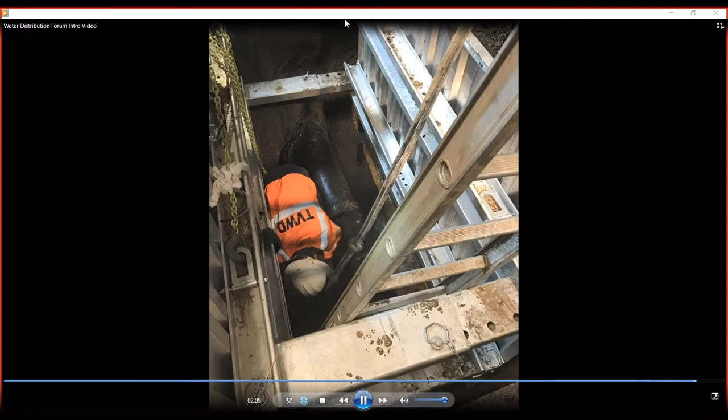We're here today to give a presentation on really what's our water distribution system, how's it work, and how do we get water from where we do to your home. So today we've got Pete Boone, who's going to be talking to you about that.

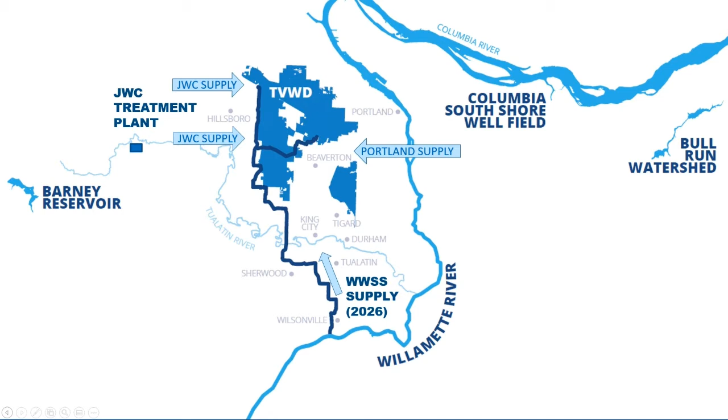So if we zoom in a little bit and talk about our service area at a little closer view, we serve about 45 square miles. You can see where we're located here in between Beaverton and Hillsboro, bounded on the north by the West Hills, bounded on the south up onto Cooper Mountain, and then we also have our Metzger service area near Highway 99 and 217. We serve a population of a little over 230,000 people.

We serve parts of some cities, so parts of the city of Beaverton, a little bit of the city of Hillsboro. We have service area agreements with both of those agencies, and we deliver that water through about 60,000 individual service connections. So the majority of those connections are residential.

Our service area is a little bit interesting. It's unincorporated county. Most of it's developed in residential form, but the majority of our service area is not part of a city, and that's a little bit unique. A lot of times when you think of urban services, all of those are provided by a city government, but in our case, it's part of Washington County for the most part, and we are one of those service providers, along with Clean Water Services for your sewer and stormwater treatment, and some others that round out that list of urban services.

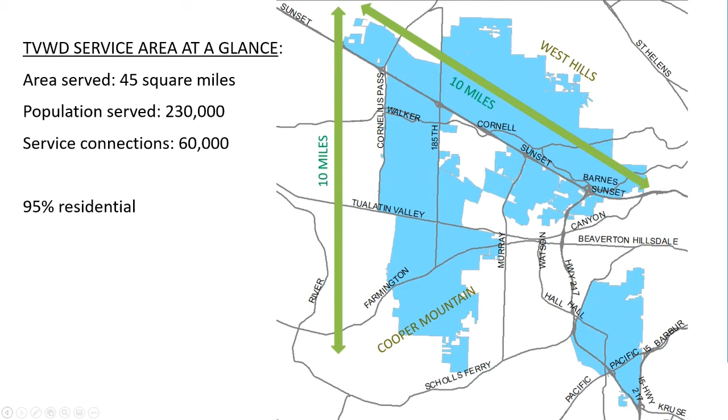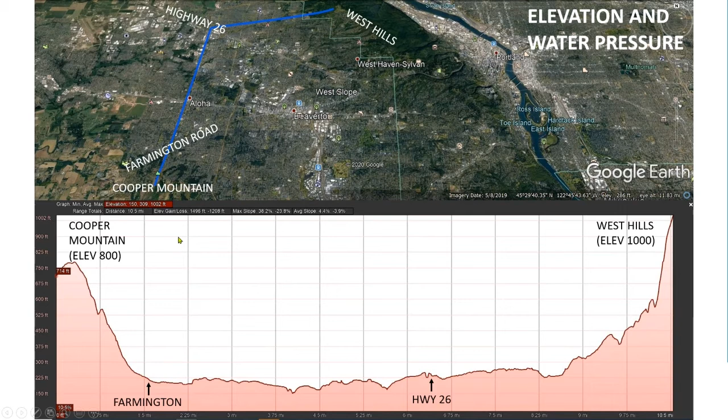So if you think about what that alignment looks like if you were to drive it, that's the lower part of your screen. So you would start up on Cooper Mountain at an elevation of about 800 feet. You would drive down to the valley floor, across the valley floor, and then back up into the West Hills. And so what's important about that is how it relates to water pressure. So if that from Cooper Mountain up to the West Hills were full of water, if we filled it up as a lake, that water would be about 600 feet deep. And at the bottom of that would be a very high pressure.

So that would be problematic if all we had was tanks at the top of the mountain and pipes to serve all the way across the valley floor, because the pressure in those pipes would match closely this depth of water that would be if it were a lake. So if you lived on the valley floor and you had 260 pounds of pressure in your plumbing, every garden hose would be a pressure washer, and every shower would be a pretty painful event. So we regulate the water pressure, and we do that in a couple ways that I'll talk about here.

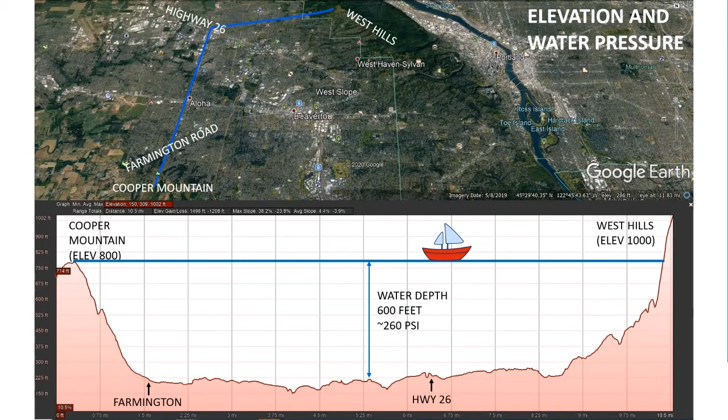But to tie this back to the human body and physiology, the corollary here that we would be concerned about is high blood pressure. If you go into the doctor, they check your blood pressure. If it's over a certain level, they're going to be concerned about that because it can cause problems in your own body, and they're going to try to regulate that as well.

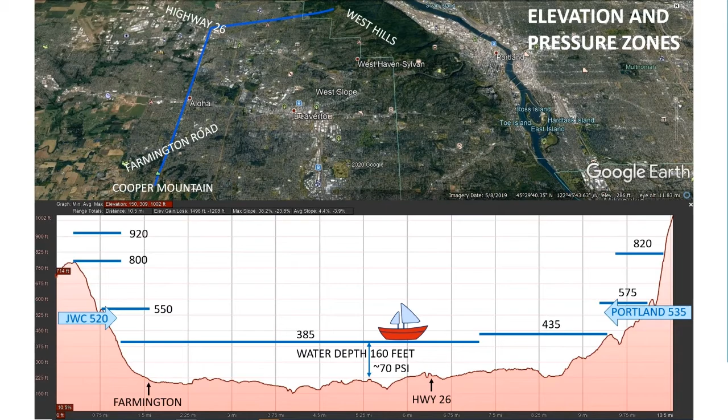If you look at the south part of that, up onto that Cooper Mountain area, we've got a pretty good collection of pressure zones. That's because that elevation is changing quite a bit. Same in the West Hills. You can almost follow the bands of elevation with those pressure zones. So we've got our service area divided up.

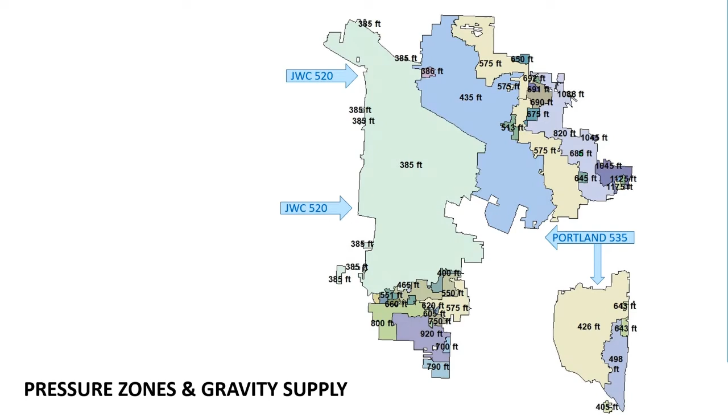Okay, so we bring water in from Portland and the JWC. We can serve a lot of that just under the gravity, the pressure that we receive it at. But to get it up to the upper elevations, we have to pump it. So we do that with electricity. We've got 13 different pump stations. Most of those stations have multiple pumps inside of them. And if we do lose that electricity, they've all got backup power generators, so we can turn those on when PGE loses power, and we can continue to pump water as we need to.

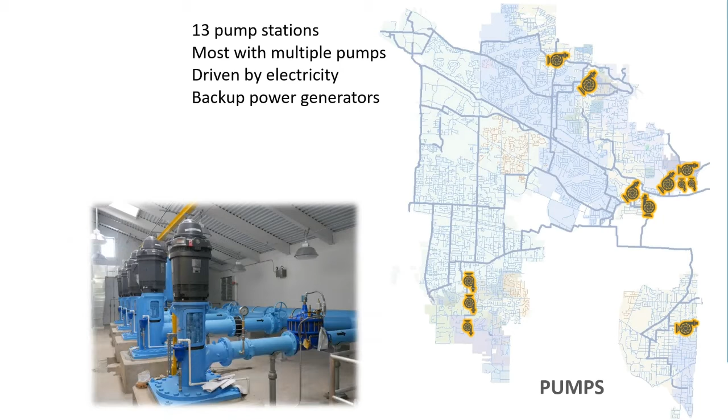And not surprisingly, the analogy here with the physiology is our own heart. Of course, our bodies only have one, and when it fails, that's a pretty big problem. So we like the redundancy of having the multiple pump stations, multiple ways to move water around.

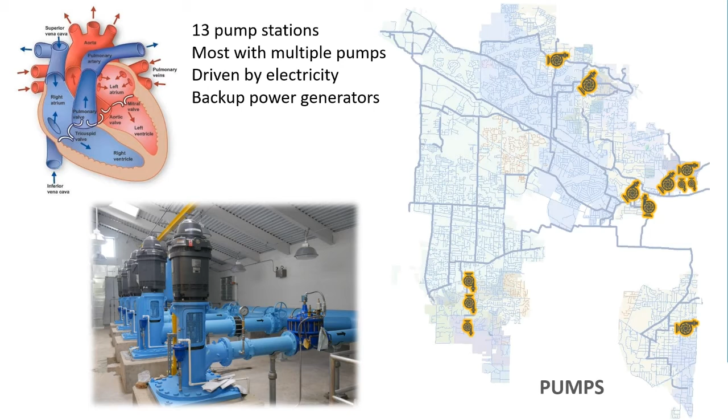The other thing we do with water is we store it. So our storage reservoirs are, not surprisingly, a lot of times located in the elevated zones. A lot of pressure zones have multiple reservoirs for redundancy. Some pressure zones don't have their own reservoir at all, but they sit below one, so they take advantage of that storage that is at a higher elevation.

Our tanks range in size. We've got 23 of them. They range in size from fairly small, so 125,000 gallons, all the way up to 10 million gallons. So our largest tanks are 10 million gallons. And this gives us a total, if they're all full at the same time, of 67 million gallons of storage.

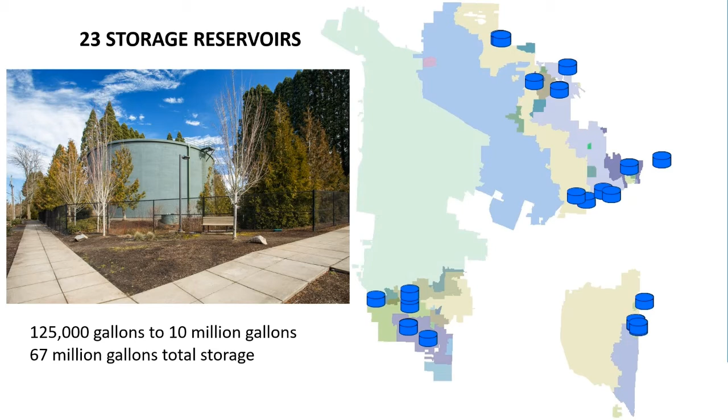But bigger is not always better, especially when it comes to water storage, because a really important part of our mission here is serving high quality water, and we want that water to be fresh. So if you can imagine, if you have very large tanks and you're not able to circulate the water through those very easily, you've got a big volume of water that's going to be getting older all the time. And so we spend a lot of time making sure that we can move that water through our system, bring it in as supply, and deliver it to our customers in a short amount of time, so that it's nice and fresh when we do that.

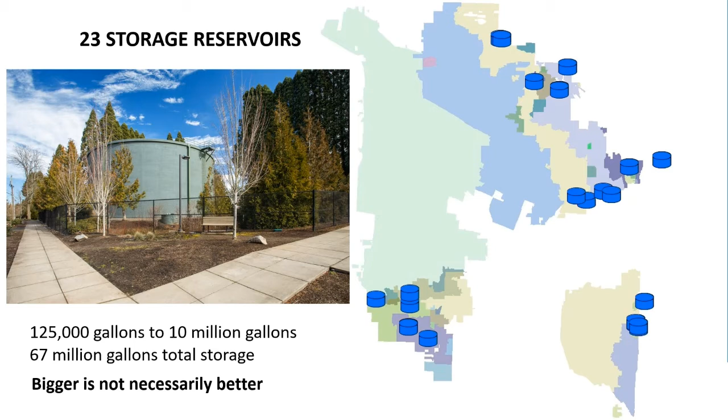And if you think about the scale of 67 million gallons, it's somewhat comparable to the Moda Center. So if anyone's been to a sporting event or a concert out there, some rough math gives you an interior volume, if the Moda Center was full, of about 200 million gallons. So we've got a little bit less than that in storage, but we're also always bringing in more and sending it out through our service connections.

It's interesting to think about going to a sporting event or a concert in the days of COVID and how long it's been since we've done things like that.

And of course, a big component of our water system is our pipe network. So we've got to move this water around. We do that through the pipes, and it takes quite a network to do it. So we've got over 750 miles of water main, and those range in size from 54 inches in diameter all the way down to 2 inches. As you can probably imagine, the bigger pipes are tied to the reservoirs in most cases, and you can see that on the map.

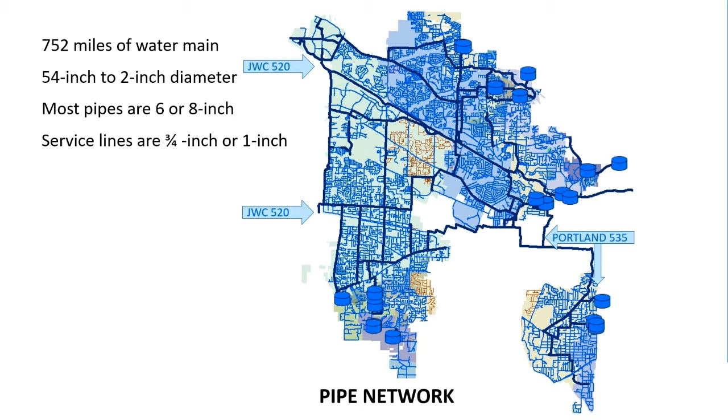And then we step down as we get into the neighborhoods with smaller pipes, similar to the blood vessels, going from arteries to capillaries and such. So most of the neighborhood pipes, a distribution pipe on your street, will typically be a 6 or an 8-inch diameter. And then the service line from that pipe to your home is going to be a 3/4 or a 1-inch diameter.

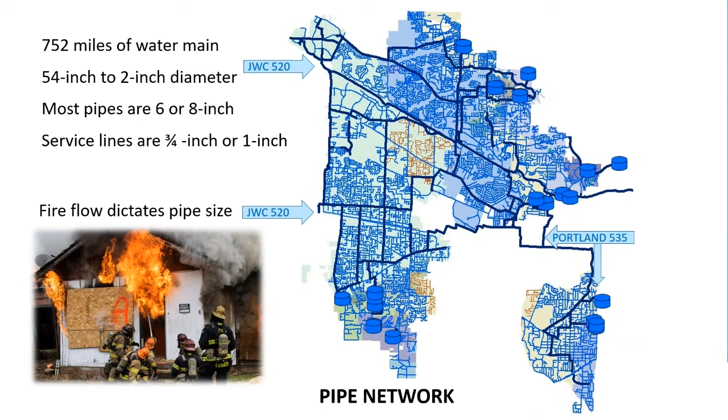And how we size those pipes, especially the distribution lines, is by fire flow. If we did not have to deliver fire flow to hydrants, most of our distribution pipes would be smaller diameter, because domestic flows are less than what a fire department's going to require if they're battling a fire. So our pipes are sized to deliver those larger flows, and make sure that we can always provide water to those hydrants in an emergency.

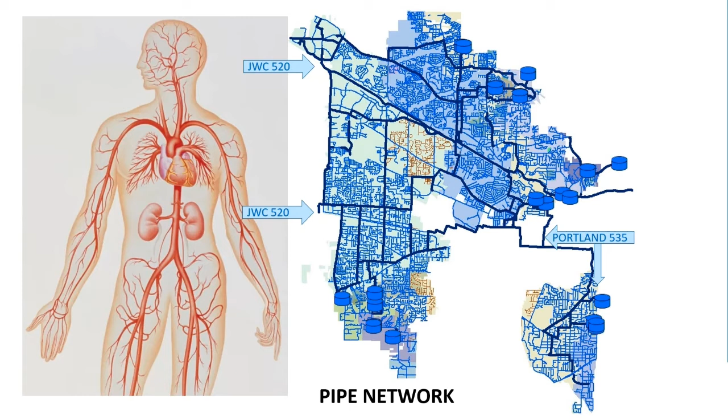And of course, our own human circulatory system is a good proxy for how we move water around as well. All right, so let's talk about some of the brains behind the system. So beyond our operators who bring their brains to work and make critical decisions all the time about this stuff, we have a computer network that's connected to most of the facilities in our system. It's a network of sensors that are constantly monitoring what's going on out there, and it helps us to keep track of what's going on. It also provides quite a bit of automation to the water system.

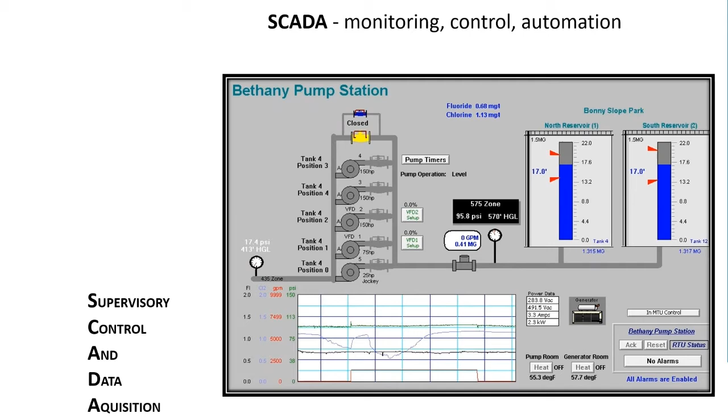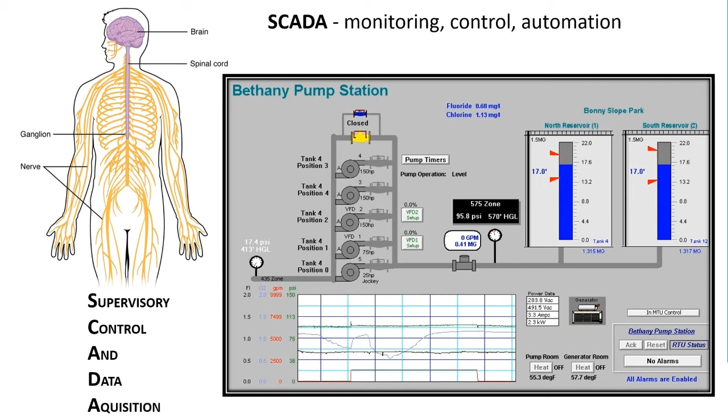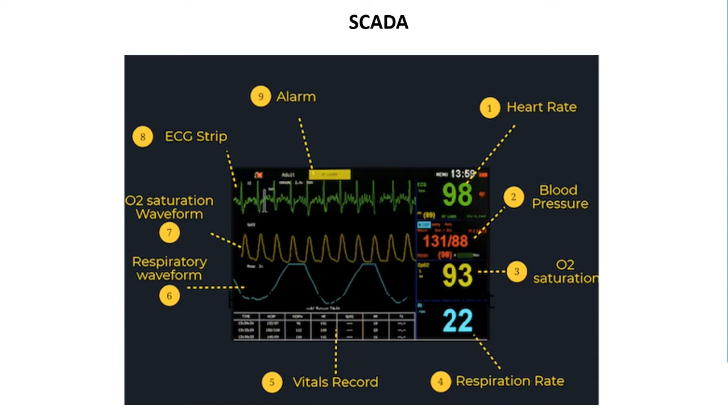And of course, the central nervous system in the body is performing those same functions in people. So if you think about a heart monitor, if you've ever had to go to the hospital, or maybe you've just seen it on TV, this is helping doctors and paramedics monitor what's going on in the human body, showing you trend lines, showing you what's going on, and how things are changing. And that would allow those medical folks to make interventions, make decisions about what they might need to do or how the body's reacting. And really, that's what SCADA is doing for us. So here's a screen showing some parameters in the water system as they change over time, and we're able to process that information and make decisions.

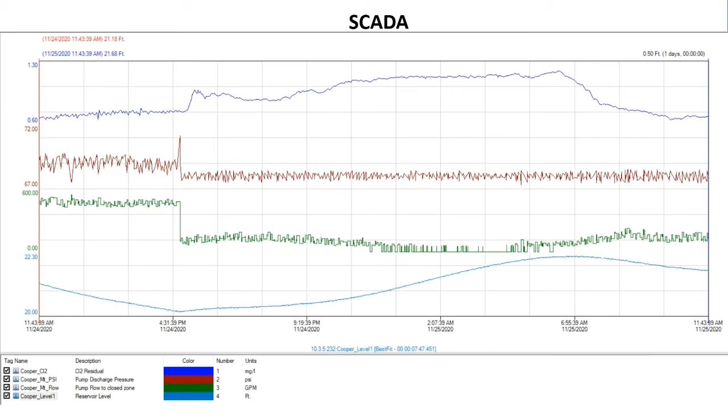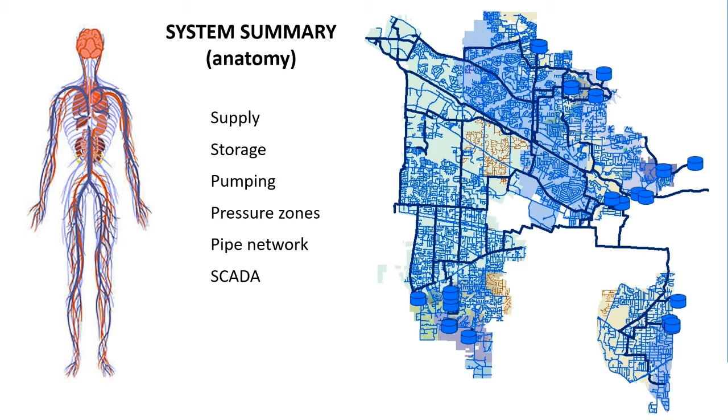So to recap, on the anatomy portion, we talked about supply, how we bring water into the system, how we move it around, we pump it, we store it. We've got our system divided into pressure zones. One critical thing to mention about that storage is, that's what helps us not only be prepared for emergencies if we were to lose one of our water supplies, but it also really helps to regulate that pressure. So as demand changes, and I'll talk about demand in a little bit, that water in the tank is always there to provide more supply as needed. We got the pipe network and of course the SCADA system.

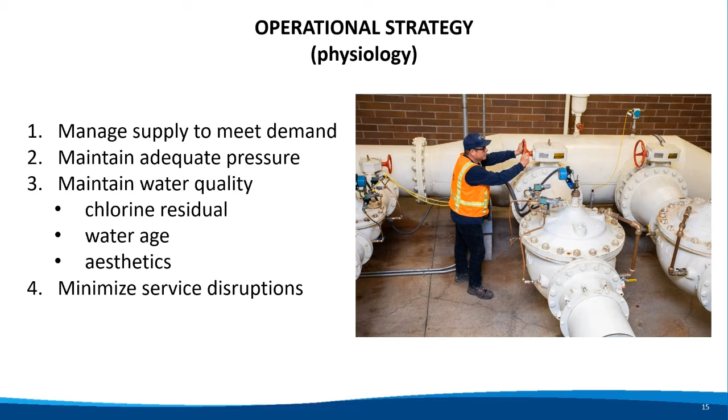So a little more on water age and water demand. So this time of year in the winter, we are serving, and it's a very steady amount, about 16 million gallons per day. So it goes up and down a little bit, but there's hardly any irrigating going on right now. So the demands are very steady day to day. That changes in the summertime as there is more irrigation and other uses of water, and we'll see that daily demand go up into the 35 to 45 MGD range when the weather changes.

And that's really what drives it. It's weather, it's temperature, precipitation, and how much folks are watering. Those are the big drivers in the fluctuations that we see in water demand. So when demand decreases, when we're serving less water out of our system, the water age tends to go up. So the time that it takes water from the day that it comes through one of our supply points to the day that it goes out through someone's tap, that's how we measure water age, and that can tend to increase when we're in periods of lower demand like we are now.

And one of those challenges is the chlorine residual tends to decrease as the water gets older. So we want to maintain that residual. We do not rechlorinate the water that's out in the system. So the best thing we can do is manage the system in a way that just uses up that water. And that storage can be a challenge. We talked about it earlier. So if we have large tanks, if we're not able to fluctuate those and use the water out of them before we refill them with fresh water, that can add to our water age.

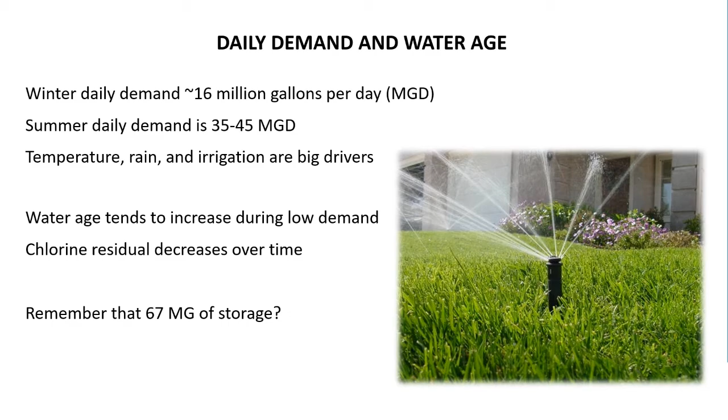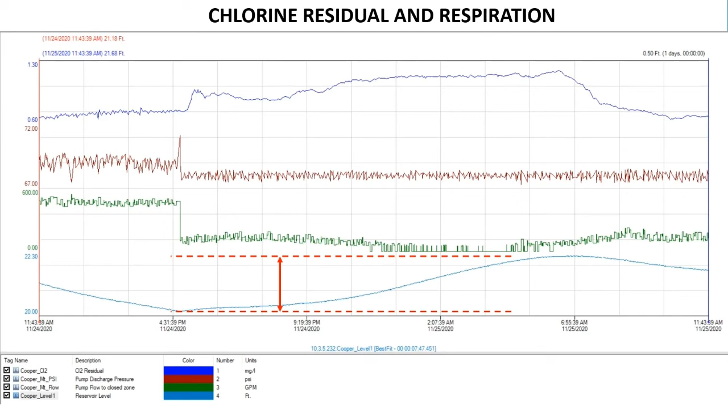So one of the ways that we manage water age, especially in our tanks, is with a concept of respiration. So when you think about how your bodies respirate, you breathe air in, you breathe it out. We try to do that same action with the water level in our tanks. So on this SCADA screenshot, the blue line that you see at the bottom, that's measuring the water depth in the tank, and we're just trying to cycle that up and down. The top blue line that you see on that screen is a measure of the chlorine residual that's in the water, and you can see how it responds to that respiration. So as the tank level rises, it's fresh water coming in, it's got a higher dose of chlorine in it, and that maintains that nice residual that we have in there to maintain water quality.

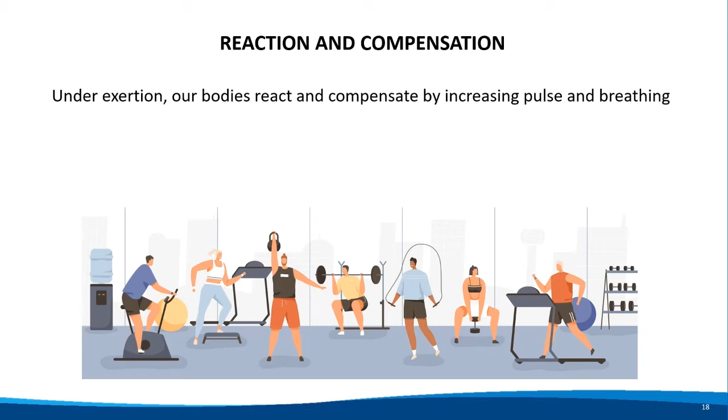All right, so a little bit about how our system reacts and changes to fluctuating demand and things like that. In our human bodies, if we're under exertion, our bodies compensate. They react to that by delivering more oxygen to our tissues. We do that by increasing our heart rate. Your breathing rate goes up, and similar things happen in the water system. So if demand goes up, customers are using more water, maybe there's a fire flow. The water level in the tank is there to serve that need, but it might draw the tank level down as it does so. When the tank level drops, our SCADA system can detect that, and if it needs to turn on an additional pump to send more water up to that tank, it'll do so.

And at the same time, our operators can monitor what's going on, and if they need to change supply or make other adjustments, they're able to do so. And we think about that in terms of automation, so the reaction that SCADA does on its own based on the programming that's in there, or intervention, when an operator would make different changes based on other information that they're seeing.

A couple things that we do to make sure that we have high quality water, and you might see us out in your neighborhood doing this. So we flush. That has a couple benefits. So one, it'll remove sediments that are naturally occurring in the water. So our water coming in from surface water supplies, especially the Bull Run, can have some naturally occurring sediment. Most times it's undetectable, but over time, as it settles out in the pipes, it can leave a natural deposit layer, and we want to flush that out. So you'll see us in your neighborhood doing this. You might see the water coming out with a little bit of brown color as that sediment gets mobilized, but it is still safe to drink.

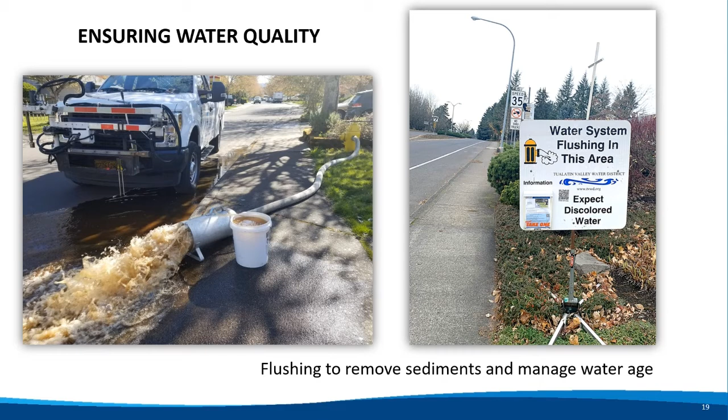We also do this to manage the water age. If the water is getting a little bit older, we don't have kidneys or livers like our human body does to refresh that. And so again, we try to use it up, and if we can't, then sometimes we will flush it out. We're continually monitoring the system, so we take samples, send those off to the lab. We have online instruments that monitor different water quality parameters throughout the system, but all focused on making sure that we have high water quality throughout the distribution system.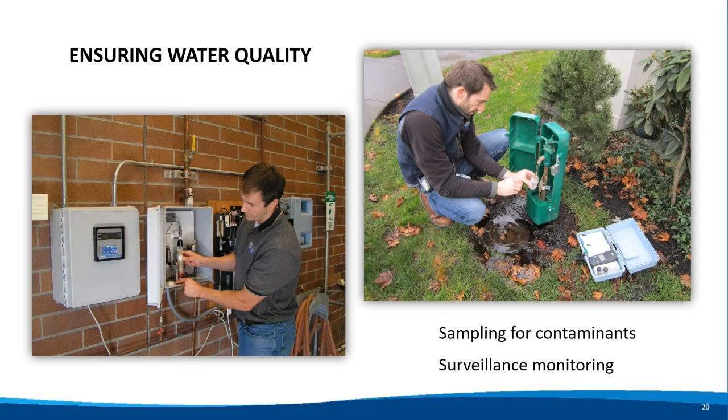And unfortunately, sometimes we do experience service disruptions. So those can come in a couple different varieties. So some are planned, some are due to maintenance or construction on the system, and we have to shut down parts of our distribution system, turn off your water for a brief period of time, make some changes, and turn it back on.

Other times that can happen under an emergency situation. If we have a main break, if we have to do an emergency repair, and in those instances, a lot of times we're not able to let you know ahead of time so that you can plan as our customer. But we try to minimize that impact by having multiple ways to deliver water. So having a strong network, a pipe network to move water around helps with that.

And really how you can help us help you is if we have current contact information for you. So if we have a phone number that we can call you, if we have an email address, we can reach out to you. That's really helpful for keeping you informed as our customers.

So you can update that contact information by going to our website. If you're watching this presentation later on YouTube, we'll have that information in the description. So you can click on a link to contact us and update that information, or you can always call us and our customer service staff will help you through that.

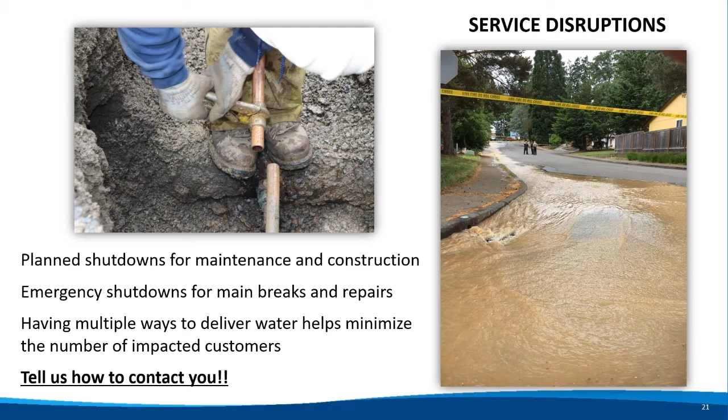A little bit about main breaks. So our 750 miles of pipe, unfortunately, sometimes they do leak and they do break. So we'll respond and fix those. Actually, we had a crew this morning already that had to go out and fix a leak. But luckily, we were able to do that without disrupting anyone's service on that street.

The majority of our pipes are made out of either ductile iron or cast iron. Those two, they're both metals, obviously, but they both react a little bit differently to changes in the underground environment. So this time of year, the soil moisture is changing as we get more rain. The temperature is dropping, and both of those things can combine to cause some shifting soils, and that can put

stresses on the pipe. It can crack the cast iron because it's a little bit brittle, and the ductile iron is a little bit different. It's not as susceptible to the shifting ground conditions, but it is somewhat susceptible to corrosion, and so that can eat holes in the pipe that eventually cause a leak.

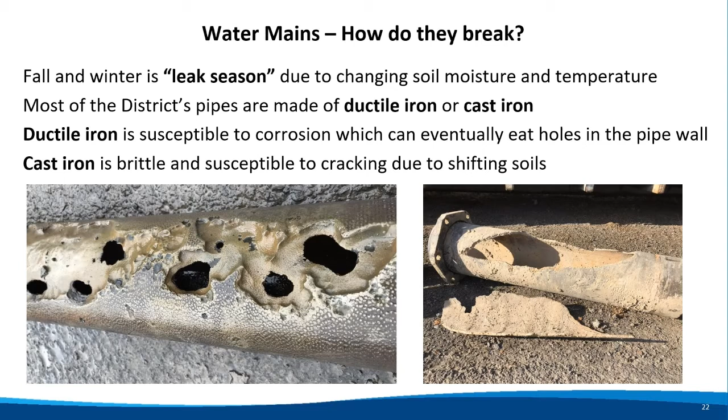And this is 5 years of data, so it shows over that period of time kind of what we've experienced in the system. If you look at it year by year, we usually experience somewhere around 60 main breaks annually. We're a little bit less than that now, but we are still in December. We expect to have a few more. I used this presentation about 3 weeks ago, and the 2020 number for main breaks was only, I think, 27 at that time. So it is always changing.

And these numbers are a really important point to remember about this. As pipes begin to experience corrosion, especially, once they start to leak, they will continue to leak unless we replace them. And we do have a program here to replace those mains once we discover that they're starting to have more corrosion issues. And without replacing those mains, you would see these numbers go up considerably. So we are constantly making improvements to the system and trying to minimize these service disruptions.

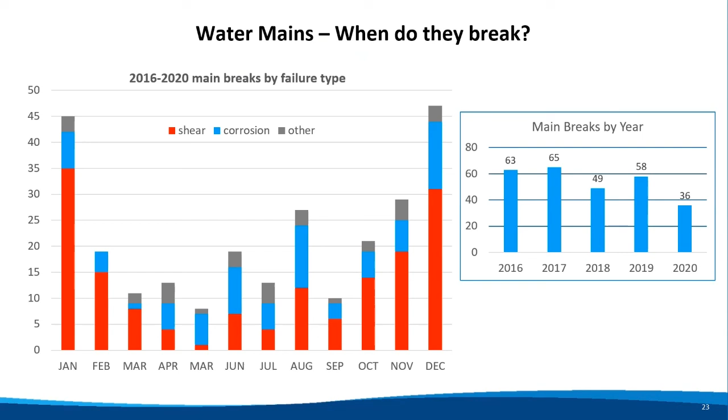Okay, then the next question is, do you have a groundwater supply other than the Portland well field? So I'll start on that, and Joel can jump in as well. Yes, we do. We have the Grabhorn ASR well that's located in the southern part of our system, right around the base of Cooper Mountain. We use that every year. We inject water into that basalt aquifer there. We store that and then turn around, and in the spring we pump that back out.

So folks in that part of the service area, you are getting some water that has lived in the ground. It's not necessarily groundwater itself, but we do utilize that investment, and we have a couple other emergency wells available to us also. Nothing to add. Perfect.

Okay, Gary also submitted a question. With the computerized system in place, how do you protect yourself and us, the customer, from a virus or intentional act to disrupt our water delivery system? Yeah, great question, Gary. Certainly in the age of more and more cyber attacks and risks related to that, it is something that we have to be very careful with. So our SCADA system is highly secure. One of the ways that we ensure that is it's not connected to any other networks or the internet.

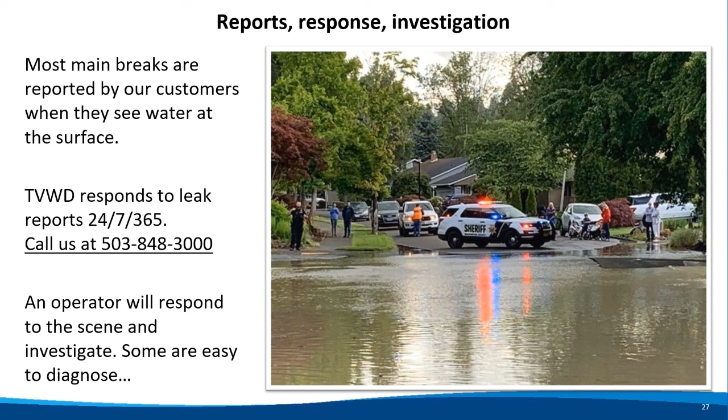Okay, and we do have another question about detecting leaks. How do we detect leaks, and at what time do you decide that the pipe needs to be replaced? So we detect leaks, and actually I have a slide for this as well, so I will jump back. So a big main break, one that's going to put a lot of water on the surface, a lot of those get reported to us by folks that are out in the community. So when you see a bunch of water bubbling up out of the road, if it looks like it's coming up under pressure, odds are that's a main break. Give us a call. We'll come out and take a look, and if we need to respond and repair it, we will. That response and repair can be an interesting operation.

Trying to figure out whether or not it's a main break can be a challenge. Lots of things can put water to the surface, and they're not always coming from our pipes. So we do investigate those and make sure that we can figure out what it is. It could be coming from an irrigation system or a private plumbing system. There's a lot of investigative measures that we have available to us. We can test the water. We can see if it has chlorine, if it has fluoride, some of these other constituents that would tell us whether or not it came out of our system.

Now, when we look at a pipe and try to figure out if it's failed or not, a lot of times that has to do with the condition of it. Looking at whatever damage had been caused to it, whether it's from corrosion or some other means, and trying to determine if it's worthy of repair or if it really ought to be replaced. And a lot of time that's a judgment call. We've got engineers on staff that help us with those decisions, and we've got a matrix that we work through, and a lot of it has to do with leak history. If we start to see a pattern on a certain section of pipe, that's going to push it close to the top of our list to get replaced. So hopefully that answered. Yes, it did.

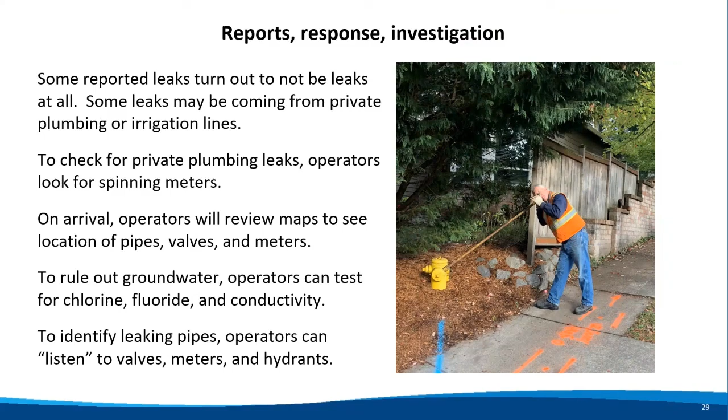We just did have one other question come in. It's from Cliff. In regards to the low water pressure on Cooper Mountain, the low pressure has only been over the last few weeks. So it sounds like a new condition. Okay, and I did see that Cliff said he was on Gassner Road. So how about this? Cliff, I'd like to talk with you directly so I can get some more information about that, and I can certainly help track that down. So if you can maybe coordinate with Andrea, you can call in and we'll get in touch with you and see what we can find out.